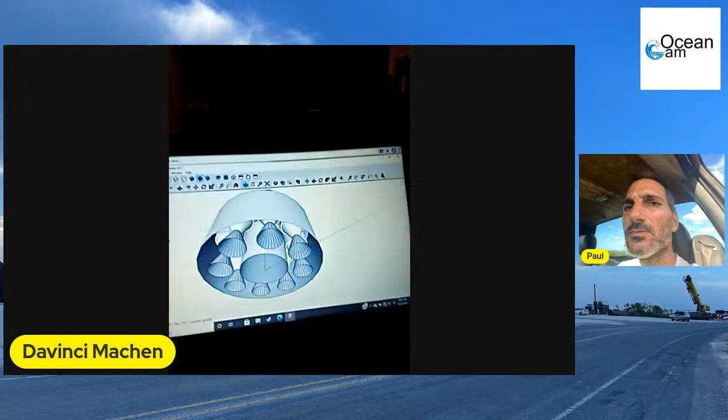So let's see, the design - how do I flip my camera? It's not gonna let me. Okay, I'm gonna have to turn this around. So if y'all could see, this is the bottom of the combustion assembly. There's 8 nozzles here. So when we flip to the top...

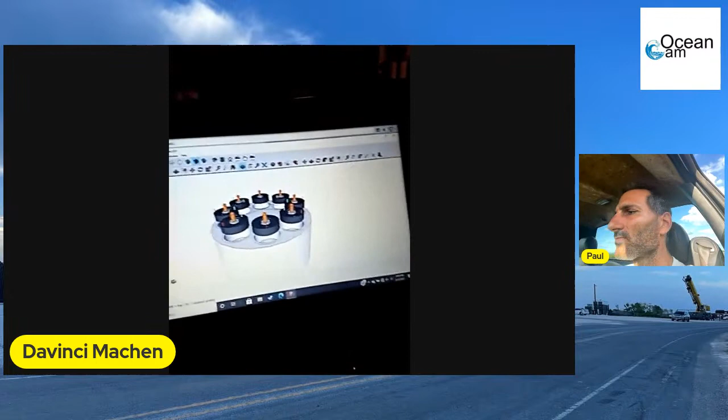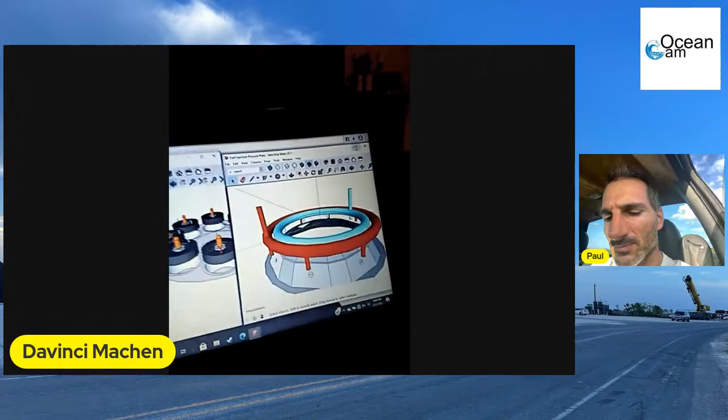These are the pressure plates, and that has the internal fuel line, fuel injection line, and stuff like that. There's 8 of them, and I used an automotive spark plug as a reference to an igniter. I hate using a touchpad, but I have 2 lines on there - let me do this, this would be better for you. So this is what it looks like on the inside: you have your oxygen and your hydrogen, or your fuel, whatever it may come to be, and then the ignition source would be in the center.

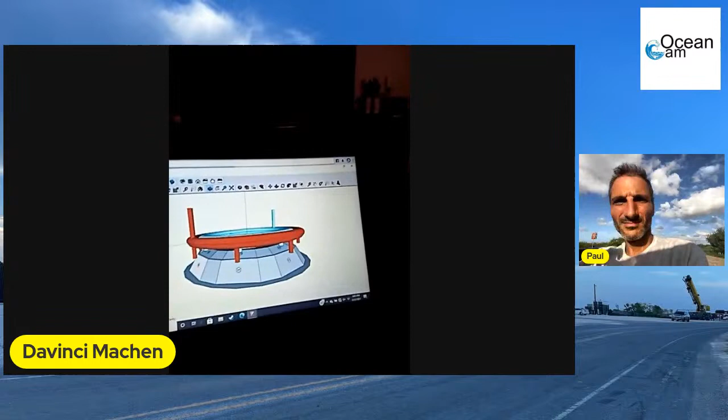If we pan back this way to the bottom of it, it's still kind of incomplete. You have all these ports - oxygen on the inside and fuel on the exterior. And I designed my own fuel injector, a coaxial injector.

Let's see - how do I zoom in on this mouse pad? But it's just like the Copenhagen swirler injector, and that's really what I kind of referenced it on. I just added more slight angles, and actually vortex. Let's see, swirl rocket engine fuel injector.

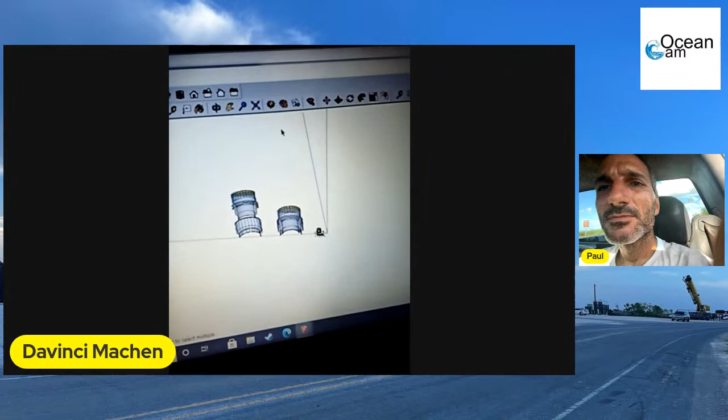You go to View and then zoom in, maybe that way. See it? This is the coaxial - is that it? Come on, there we go. This is a cutaway view of the Copenhagen swirler injectors that were made by Danish engineers.

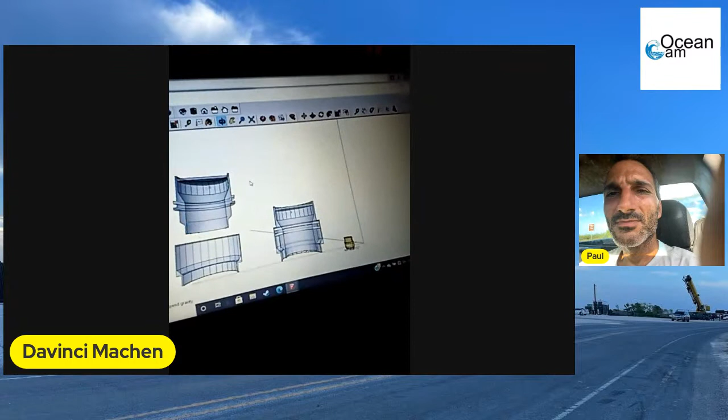Now that I know how to zoom in using the mouse pad, we're going back to our injector. Give a brief summary of what's going on here, what we're looking at overall. So what we're looking at is basically a fuel injector of a rocket engine that I've designed, and I'm trying to zoom in on it on a touchpad, which really sucks.

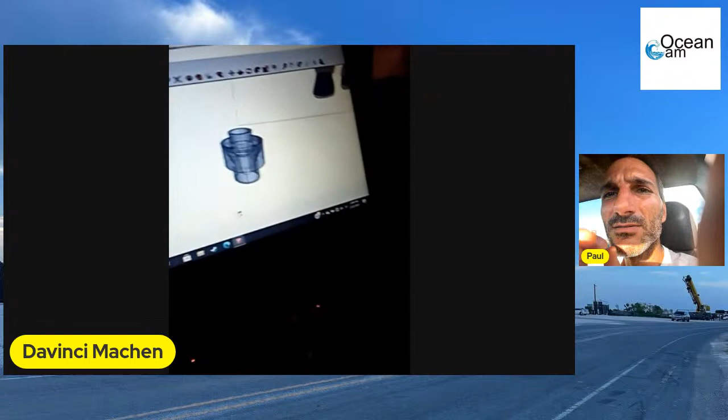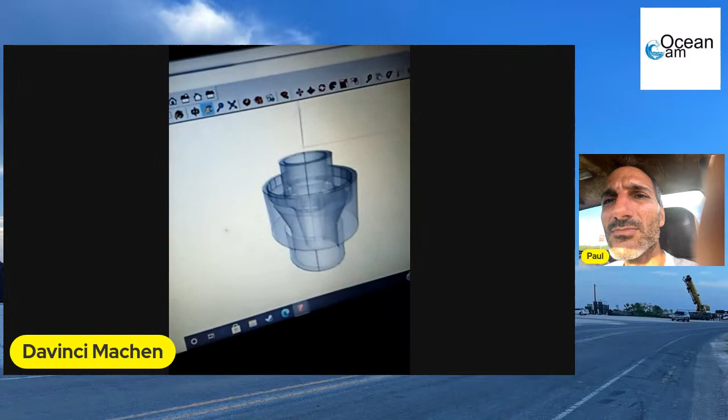So you have your fuel that comes in on the side and your oxygen that comes in to the center. It's like a fine spray that comes out right here and mixes the fuel. It reminds me of a ramjet engine or something like that. Does that make any sense? It does, it does, okay.

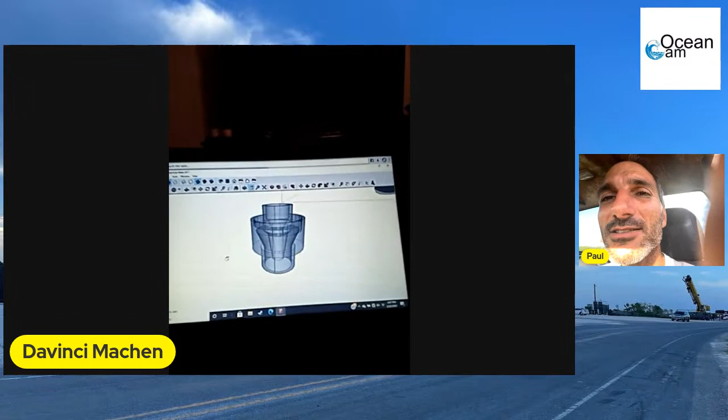And I studied Scram and Ram, and there's another one that I've designed in the past. I kind of mixed the two, and that's kind of what I've been doing.

Really, with the wastewater treatment power plant, the technologies exist today. All I'm doing is combining a water treatment facility, a power plant, and a desal plant in a more modern way that's cleaner by using electrolysis. By using electrolysis you could separate liquid at the atomic level by turning H2O into HHO, separating liquid from the solid matter. Then you combust it, turn it into heat and steam, and it goes to a turbine.

And instead of that heat and steam escaping into the atmosphere, you run it through a condenser coil. It could be a copper coil like moonshiners use. As long as it collects the droplets, then you have atomically purified water, and so you could send it out.

On the other hand, with the steam turbine, you hook it up to a couple electric generators, more than one, so you can maximize efficiency, producing whatever power per one. So figuratively, if one engine motor produces 12 volts, and you hook up 3, you're producing 24, 30, 36 volts off of one turbine. So you're maximizing efficiency, combining 2 facilities into one, and the technology all exists.

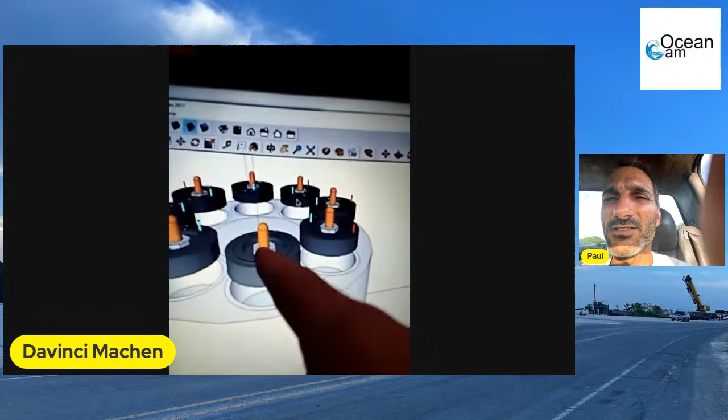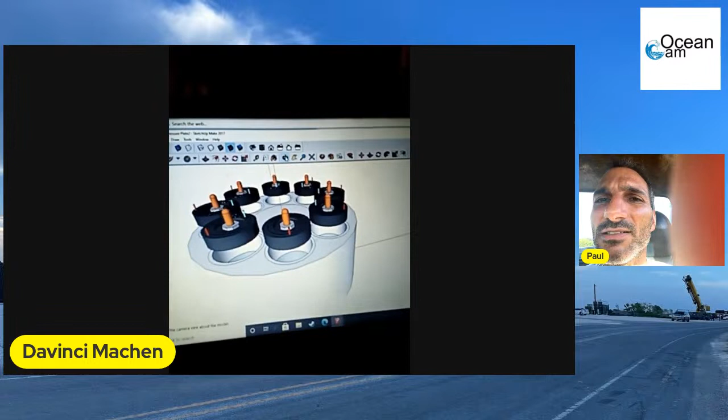The combustion assembly is basically a mixing head, a combustion mixing head with internal fuel injectors, which this is pretty much what that is. So your igniter will screw into your pressure plate, your combustion pressure plate. Your combustion pressure plate will screw into the combustion port, and this port is all an assembly. So this is the combustion assembly. On the bottom side it has nozzles, which exert the vectored fuel and pressures, so there's 8 of those nozzles on the bottom side. I know it kind of looks rough because it doesn't have the fill in around the nozzles.

So is it 8 around and 1 in the center? No, the center is just for weight reduction, so that way it's not completely solid. On this scale we're probably looking at a half inch separation between each port, and this would be like a small scale hobby build if it was to be built.

For a test, I couldn't finance a fully 12-foot rocket engine. So something small, within 8 inches, I would assume I could save up for, or get something made if I had the right direction to go.

Well, what if a bunch of people from SpaceX who already work on the Raptor engines were watching this? Because this is the Boca Chica SpaceX crowd that watches this channel. It'd be awesome, they do the designs and everything, and maybe Elon might eventually watch this as well. What would you want to say to them, or what kind of thrust do you get, or what kind of liquid cooling might you need for full scale?

Full scale, what would that be? Theoretically, I guess the only thing you'd really have to change would be the fuel injection nozzles, so that way you can burn different ratios or different types of fuel. I kind of built this to run different types of fuel: methane, hydrogen, hydrogen peroxide, kerosene.

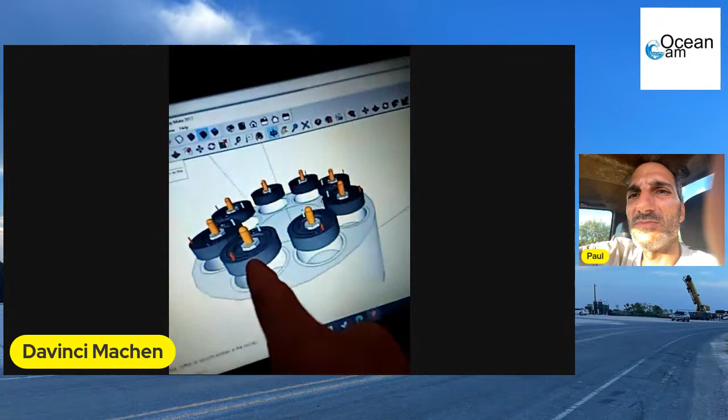Okay, I'll have to bring it back up. So we're gonna zoom in on one of these by itself with a cutaway. We're gonna open it up, where is it... fuel injection plate.

Yes, come on. Oh, you're being a pain. Let's see, open. I don't know why it's being a pain.

For all you watching, I was over at the launch site. I got a whole bunch of shots, and I got the lifting of the GSE tank cover for the final tank there, so I did get that shot. I'll upload that footage later tonight. I wasn't able to get to my phone because they had the road blocked off, but I had my other camera, so I got that footage and will be uploading it later tonight.

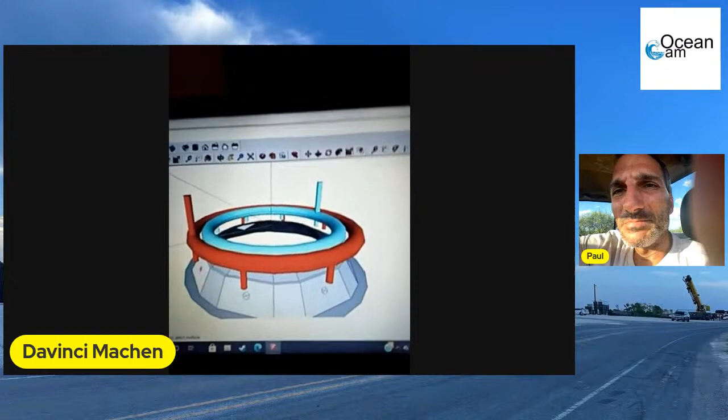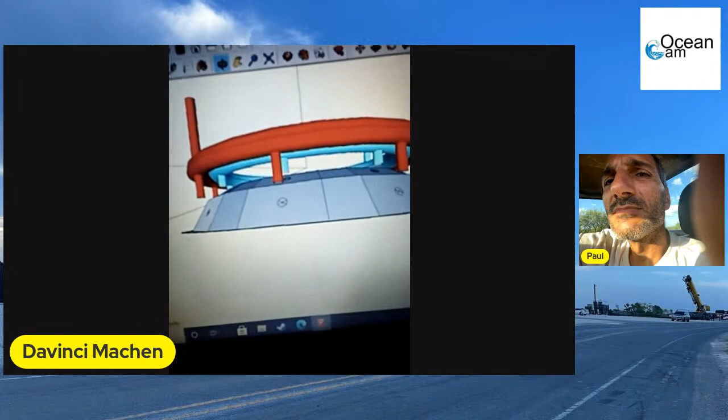Okay, so from the pressure plate, this is basically the internal, incomplete internal view of it. You have your red line and your blue line. Your blue line is obviously your oxygen, and your red line is your hot line, your fuel line. This is pretty much what it would look like if it was see-through. You'd have your igniter right here, your fuel lines here, and on the bottom side, those lines will connect. I just haven't had the time to connect them, and they would be sprayed out of here.

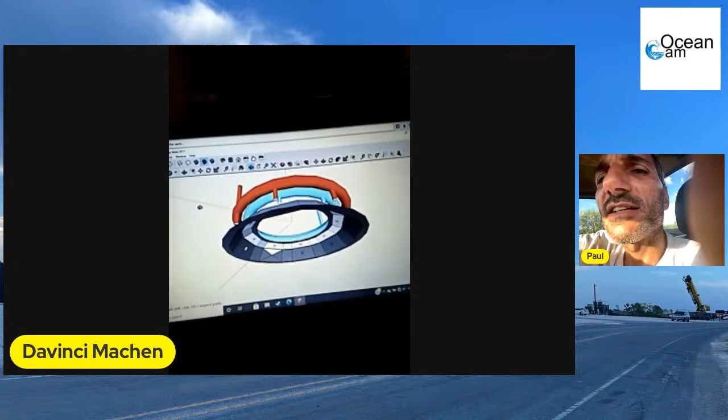So it could go both ways. I could run Ys with an injector at the Y, and then have it come into the bottom side of the plate, and have shutoff valves at the main fuel line entrance to regulate it, right? Yeah. So one of them is oxygen. What's the other one? Just any other fuel, or fuel.

So when you pressurize, you're pressurizing upon pressure. So you have to have that constant pressure going through, even with the turbos, to get that fuel going, and then you can combust it. So you could have those shut off.

What are some of the fuels you could use for the red one? Like I mentioned earlier, it depends. I want to try to do a universal fuel injection injector, so that when you twist it, it tightens up, and when you loosen it, it loosens up, spreading your ratio of fuel and oxygen. That way you don't have to take out these injectors and put new ones in for different fuel. You can just, like on the carburetor on a lawnmower, turn the little screw and change up your fuel mixture. Same instance, you could do the same.

I just got to kind of redesign my swirler coaxials for that, which I think wouldn't be hard. I just got to get the time.

So that was one rocket engine you were showing there, and again, there's 8 of those, right? The engine is the complete assembly. This is just one of the pressure plates. This is the internal view of the pressure plate where the igniter screws into. And then the pressure plate will screw into the combustion assembly. The combustion assembly will screw into the main nozzle.

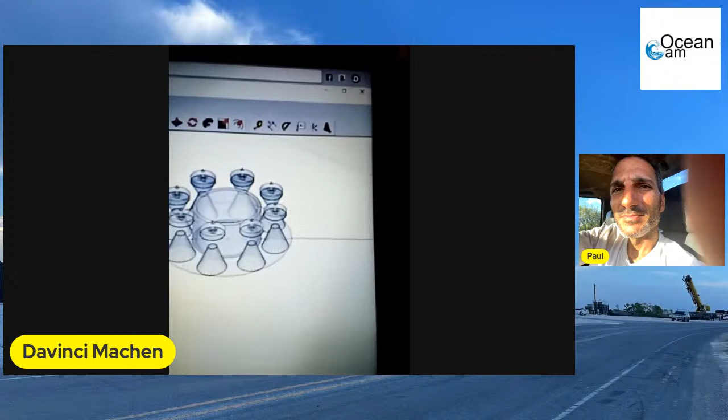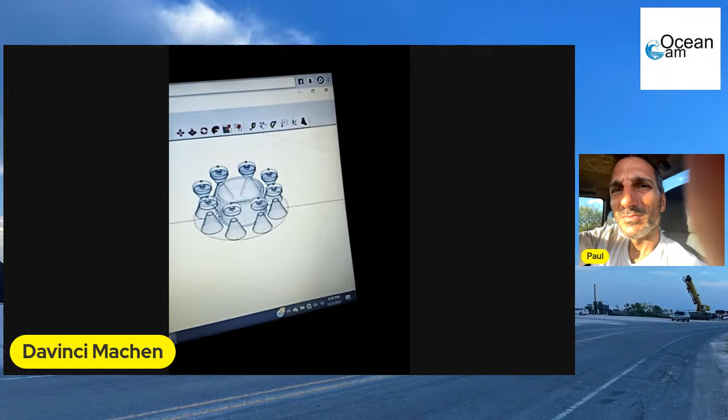Alright, so this right here is basically a cutaway see-through of the pressure plates in the combustion assembly position. And so this is the assembly of all the nozzles. And I don't have, well, yeah I do, I do have the igniters. There we go. So yeah, that's what it looks like, see-through like that.

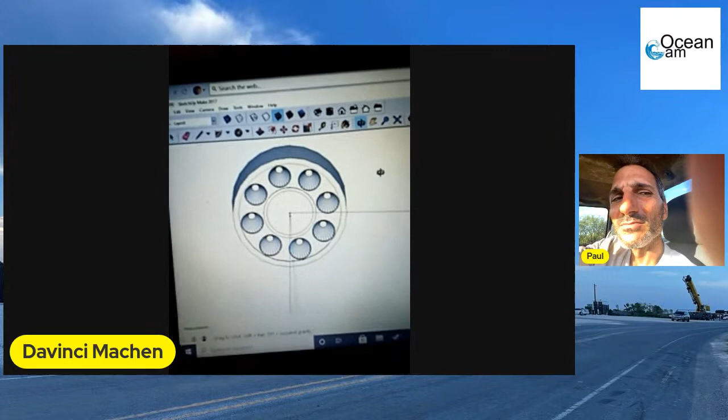So you have this outer ring, and that's the setting for the combustion assembly. And if we pan down, we have those ports right there, if you can see that. And so this assembly right here will screw into a nozzle, just like these small nozzles.

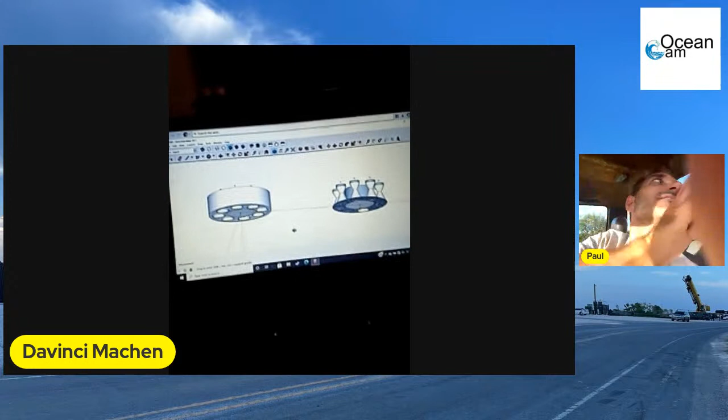Screwing on the top or on the bottom, do you think? So the combustion assembly will screw into a main nozzle, so there'll be a big old nozzle right here. So that's the part on top that we're seeing on top of those nozzles? Yes. Okay, this would be like a mixing head and combustion assembly in one. I got it, so you have the mixing head on top of the engine, then you have the combustion, and then you have the throat and vector.

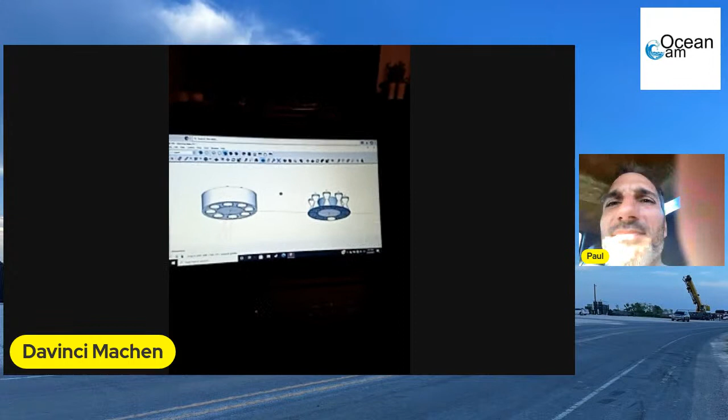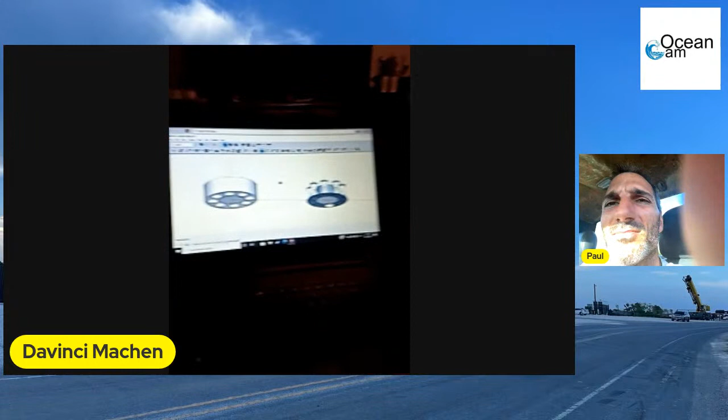Well, I'm combining fuel injection, mixing head, and combustion all in one, and I'm doubling that pressure. What was that last part? You're what? I'm doubling that pressure. I got you, so each one of these produce, figuratively, each one of these produce 1,000 PSI, so that's 8,000 PSI total. And you put this assembly inside of another nozzle, it doubles that pressure if your throat ratios are right.

So the piece that I'm getting rid of, really, what do you mean by that? Well, this design combines a few things and simplifies something, I think you were saying. Yeah, so I wish I had it. A regular engine, on top of the engine is where the fuel goes in and the oxygen goes in, and you have these little ports like baffles that spray the fuel out, and that's your mixing head.

Well, you have igniters in that chamber there, and that's what makes the combustion. And it channels it down because one end is a dead end, and you have a channel that goes down and it goes to a squeezing point. That's how you create that pressure from combustion, channeling that pressure through that throat, and it gets exhausted out. And that's how you get your forward momentum or force pressure.

So I'm basically simplifying the mixing head and combustion. I'm condensing it, adding more ports to the same engine. Instead of having this bulbous engine with one deal, I have this bulbous engine with multiple internal engines. And I'm basically producing internal pressure like a regular modern rocket.